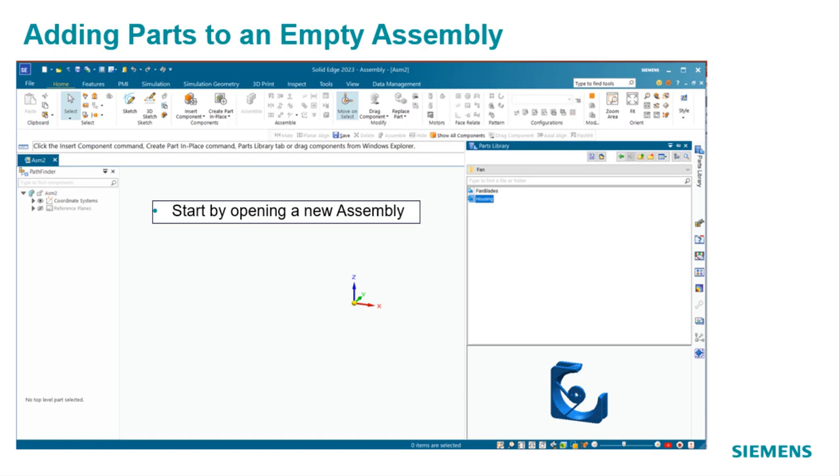In the previous example, we started with an assembly and the parts were already in there, ready to go. In this example, we're going to start with a new, empty assembly and add the parts.

So to get started, we'll come up to File, New. We're coming down to Metric Assembly. You'll see there's no parts in the assembly.

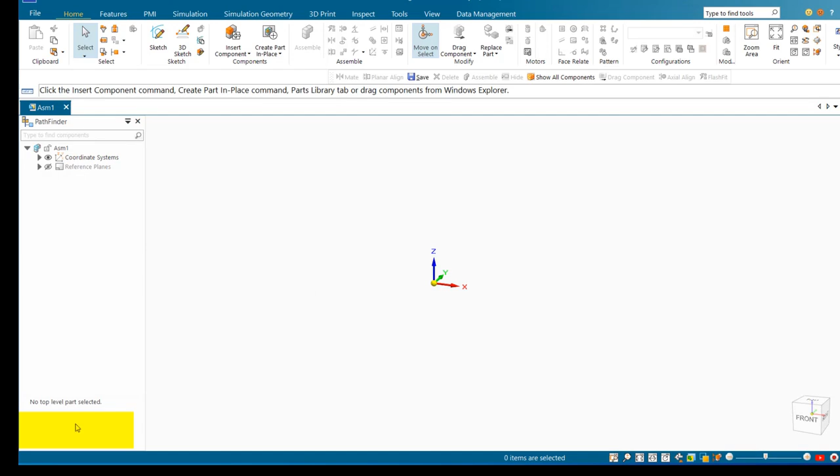Something else I'd like you to pay attention to: see down in the bottom left-hand corner, this is empty down here. It looks like empty space. Watch what happens when we come over here to Parts Library, and this is where we're going to go to get our parts. So I came out to my class files, then Assembly, and I'm coming down to Fan.

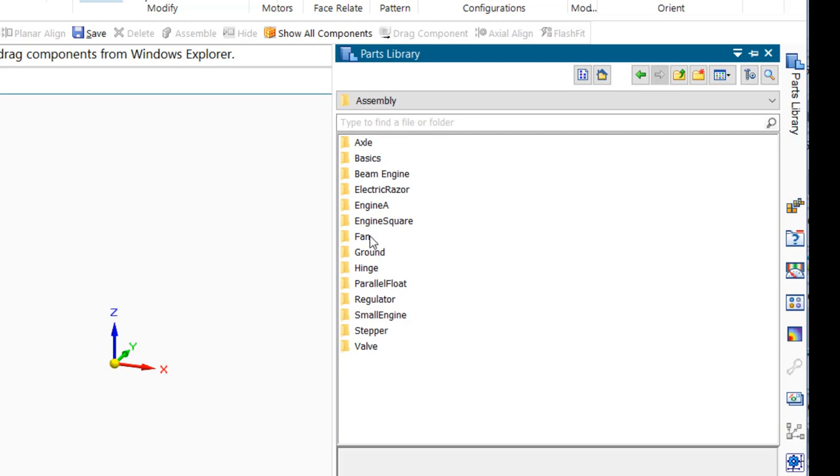I'll open the Fan folder, and then the first part I want to bring in is the base part, the big part. You don't want to bring in the bits and pieces. If it was an engine, you'd bring in the engine housing, not the pistons, for example.

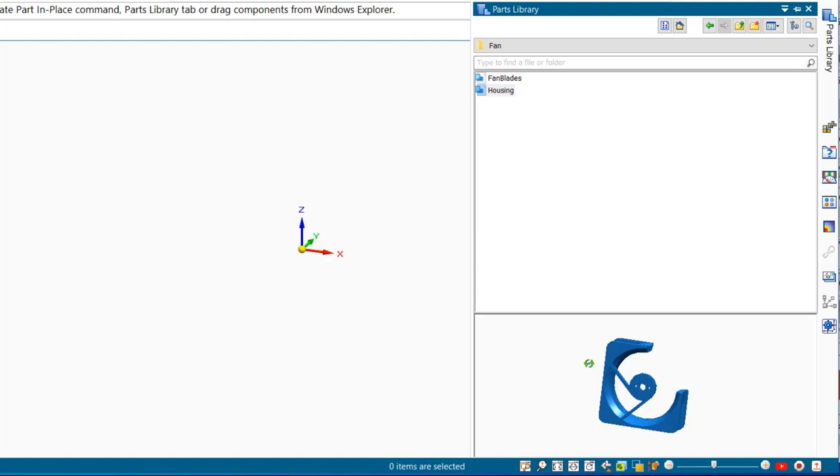Now, another nice thing here is you can rotate this to any orientation, and whatever orientation you have it here, that's the orientation it'll come in at. So let's just put it about right there. Then all we need to do is drag the housing into this white area, and it places the part. Back to the parts library,

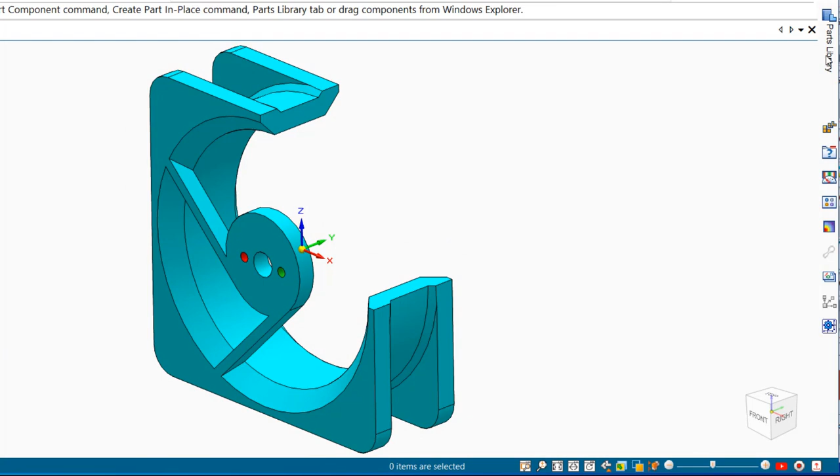This time I want the fan blades. So there's the fan blades. I'll drag the fan blades into this white area.

Now this is green, and that means it's waiting. It's waiting for me to tell it what to put together with what.

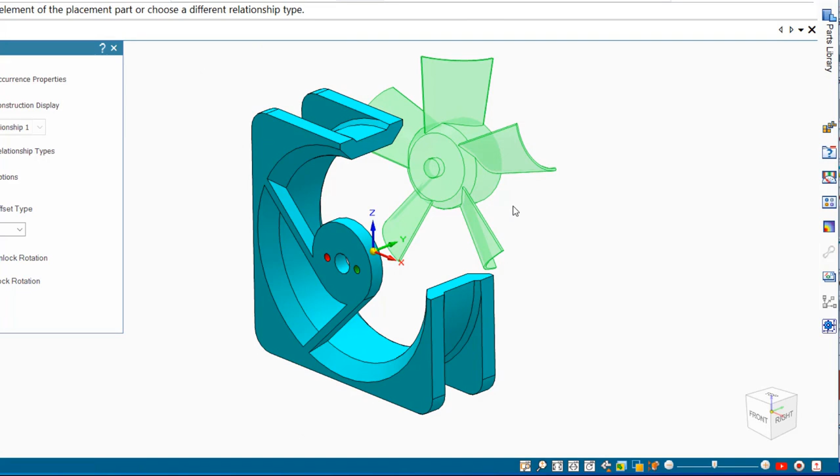So I'll come up here, and let's zoom in a little, and I'll identify this cylinder. I'll pick on the cylinder, and then I'll pick on this cylinder here. Now that may not look like it's together, but if I look at it straight down the barrel there, you can see it is aligned.

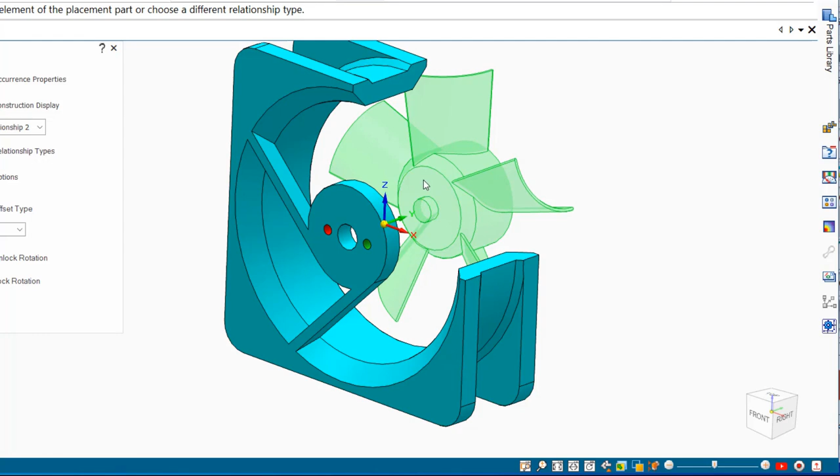Now it's still green, and it's asking me for the next constraint. So I'd like to take this face, this around, and mate it to this face. So now the fan's in position.

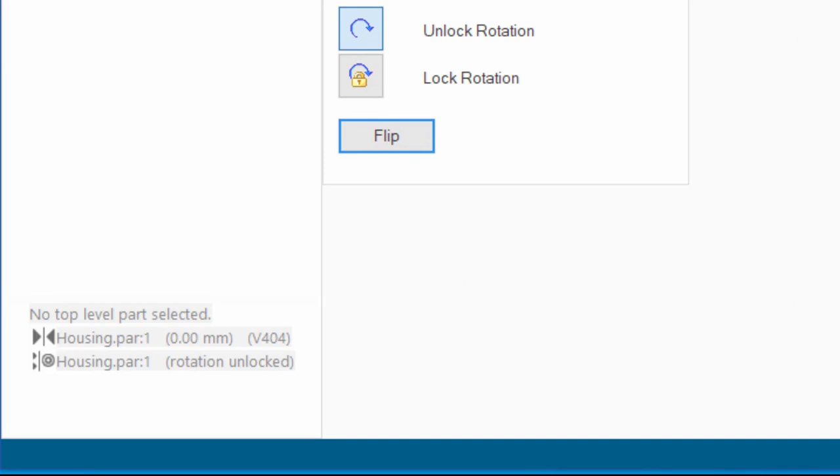As I said earlier, if you come down here and look, you'll see this is adding those constraints. Here in Pathfinder, it adds the housing and it adds the fan blades. I just wanted you to pay attention down here—these are the constraints, and we'll discuss this in more detail shortly.